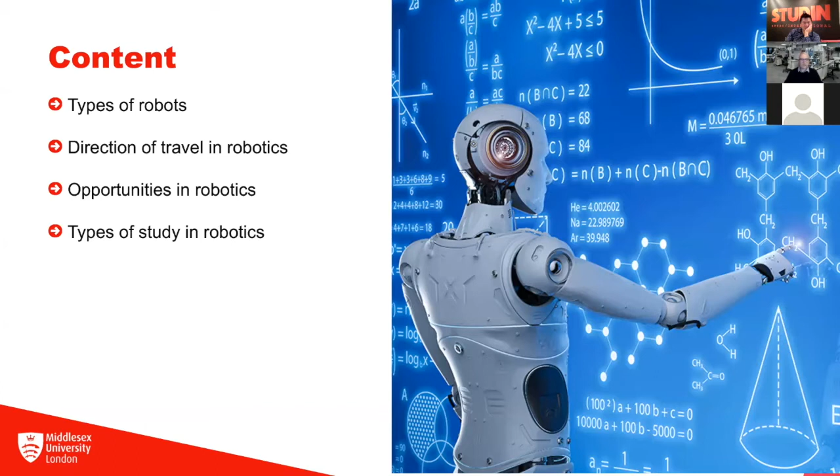I'll try and give you some examples. If we look at the types of robots that are currently around, initially we only had industrial robots, and we used to classify them based on their geometry - Cartesian robots, spherical robots, etc. But these days we have a lot more other robots around rather than just industrial.

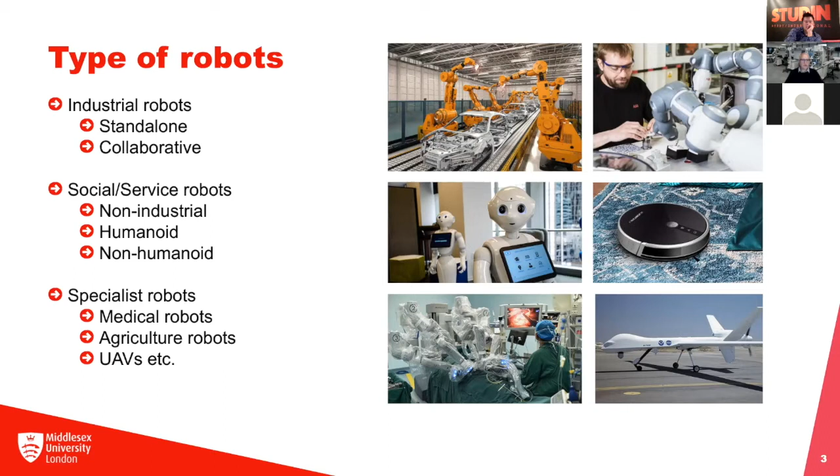So all of this gets under the title of robots, and I'll go through each one of those three sections and give you some examples of where the state of play is.

So industrial robots haven't quite grown as much as they should have in the past. But if you look at the more recent figures, there are currently about 2.7 million industrial robots operating in factories around the world.

But as I said, only recently has that actually increased - 85% increase we've only seen in the last 5 years. It's becoming quite a large sector in terms of revenue or value in installations, looking at close to $14 billion industry. And 73% of that investment is actually taking part in 5 countries like China, Japan, USA, Korea, and Germany - those are the countries that actually have the biggest number of robots.

And if you look at the density of robots around the world, and we look at the employees - if you divide the employees by groups of 10,000, for each 10,000 employees there are 113 robots worldwide. Obviously, these are concentrated more around different countries.

For example, if you take the same measure and look at the top 5 of dense industrial robots in the world, you'll see the five countries - Singapore, population-wise, tops the biggest density. They have 918 robots per 10,000 employees, where in Sweden that's down to 277. It's significantly more than the UK, you might say.

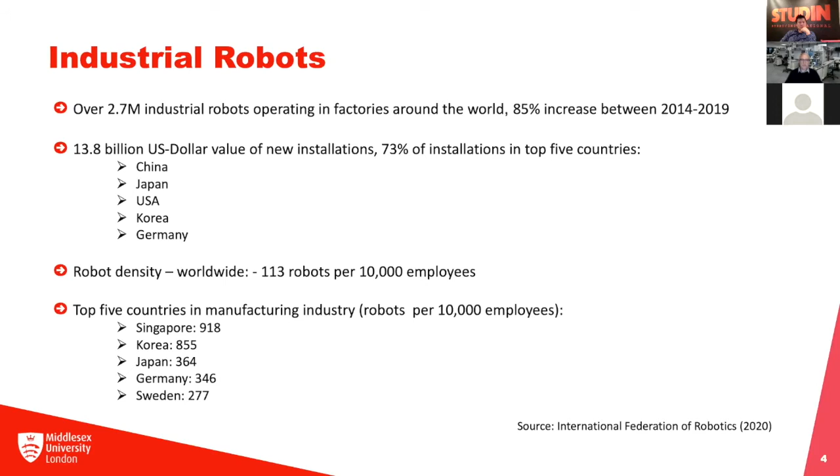They offer several advantages compared to industrial robots. They no longer need a protective environment, for example they don't have to be in a cell, they can just be in a workplace with other people around them. A lot of companies use these because they don't need specialist labor. Untrained people can still use these robots to program them because they're task-led. They can just remember what you show them they should do, and they often complement human-led operations.

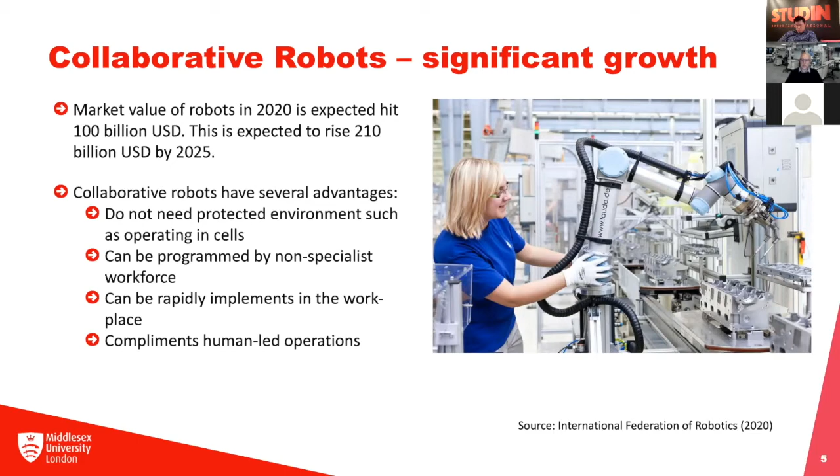Sweden is actually quite good at this, and I'll give you a quick video of how this is used in practice. This is a clip from ABB Robots.

Yeah, but we'll see. Let me just see.

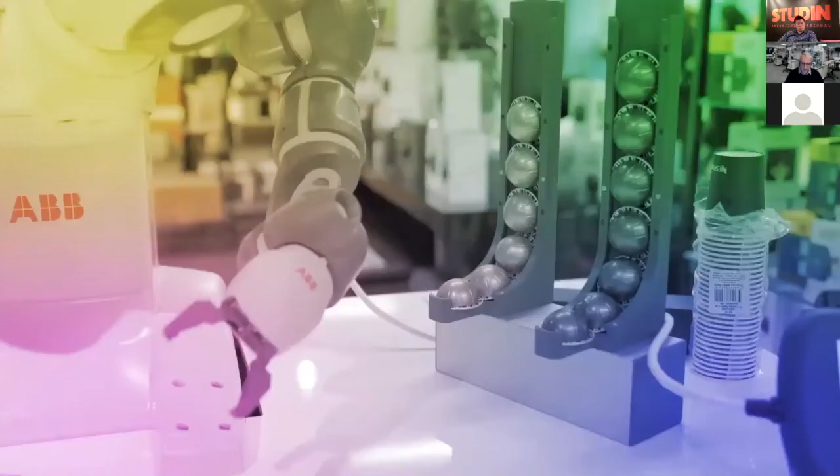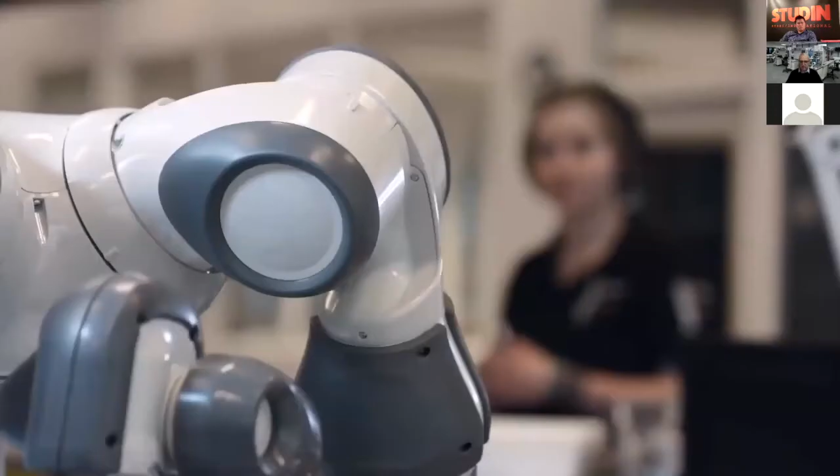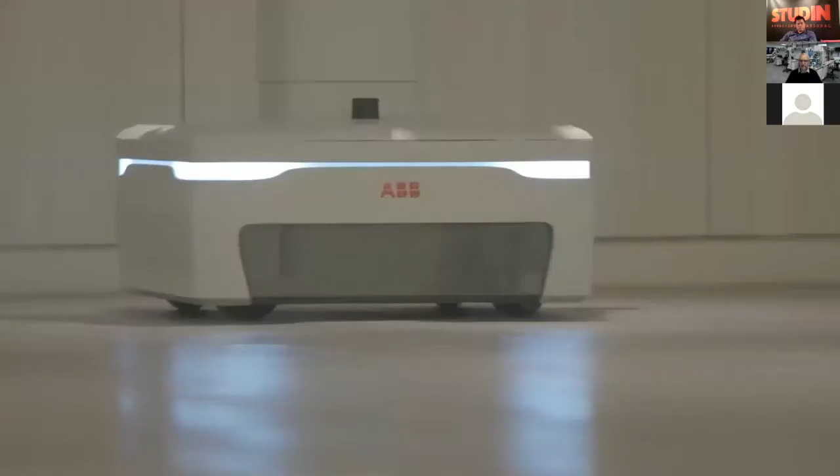Yumi is 5 years old this year, and in the 5 years since ABB's collaborative robot was introduced, it certainly proved a tasty treat for the public, conducting operas, starring in music videos, and meeting a host of world leaders. But Yumi is about so much more than just eye-catching photo ops. For industry, the advent of a truly collaborative robot working alongside human staff has been little short of a revolution. Before Yumi came along, robots were typically corralled inside protective cages or behind safety barriers. Yumi's different. With an ergonomic, human-centered design, padded arms and motion control software, it can be installed in workstations alongside people, working collaboratively on tasks with human colleagues. And lead-through programming means it can be programmed in minutes by someone with no specialized training. That all makes it ideal for material handling and assembly jobs, while its accuracy has meant Yumi has found a place in medical research too, increasing hygiene and efficiency. The Yumi family has continued to grow. The concept of a mobile Yumi has been tested, and there's also a single-armed model that can be mounted on tables, walls, or ceilings. Yumi led robots out from behind the barriers, and it's now looking forward to another 5 years of human-robot collaboration.

There we are, just celebrating with those successes from Sweden, but I think they're also manufactured around the world, particularly in Poland, but they're sold globally. We also have research centres within the UK using this, and at Middlesex where I work, we also have several of these robots as well.

Alongside the industrial robots, the new category of robots are called social robots. These tend to be seen in non-industrial applications such as personal assistance, customer services, and more in terms of healthcare. I'm not talking about entertainment robots, these are actually used for daily supportive activities. A lot of developed countries are now preparing to invest into social robotics, particularly for healthcare applications and caring for people.

I'll also show you some videos of work currently taking place at Middlesex with other collaborative partners around the world, including Sweden.

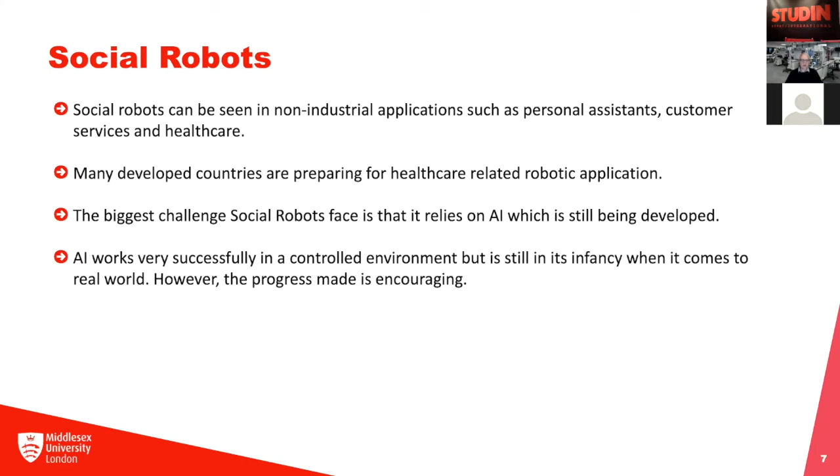So the next video I'm going to show you is a project called Caresses. This is a European funded project across 8 different institutions from Europe, spanning Sweden, Hungary, UK, and also Japan. The purpose is to look at culturally aware robots and how these will be developed in cases where we look at healthcare, and how this can help deal with people, particularly the elderly.

This is quite a longish video, so I'm going to play it a little bit at the beginning and then skip it and give you some examples at the end.

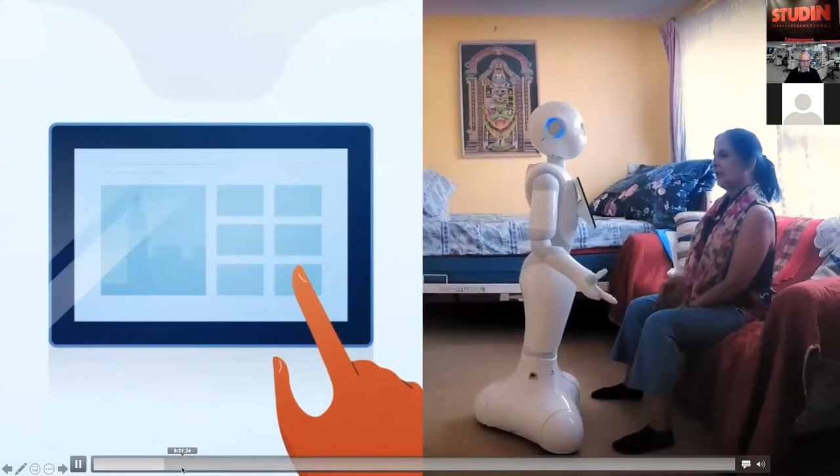Which monument is in this photo? It is the Westminster. Oh, wait a minute. Big Ben. That's correct. Well done. Thank you.

Do you want me to play for you one of the highlight scenes of the movie The Ladykillers? Yes, please. Great, let's do that.

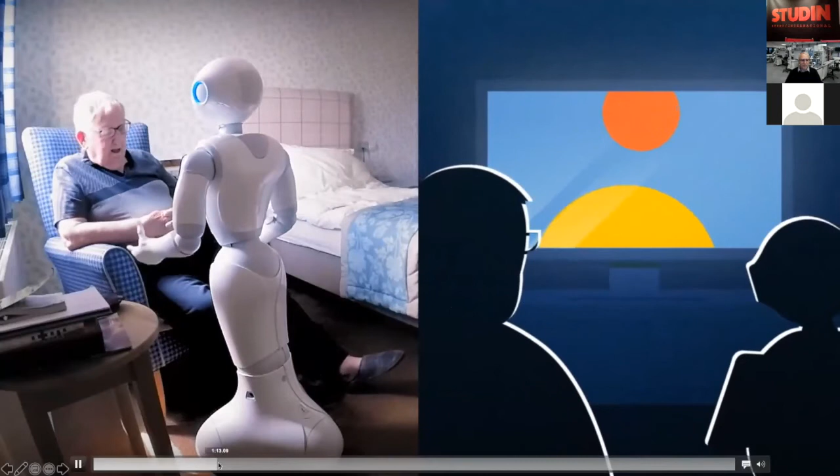Tell me what kind of situations make you feel happy. Lovely, lovely to be with Pepper. I'm a very cheerful lady, I love children. I'm happy to be surrounded by the children. I like lovely music. I don't like to be alone, because I was born in a very big family.

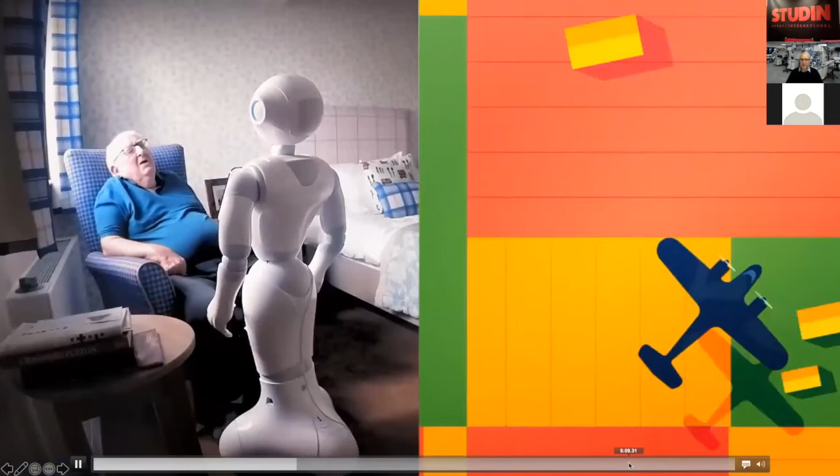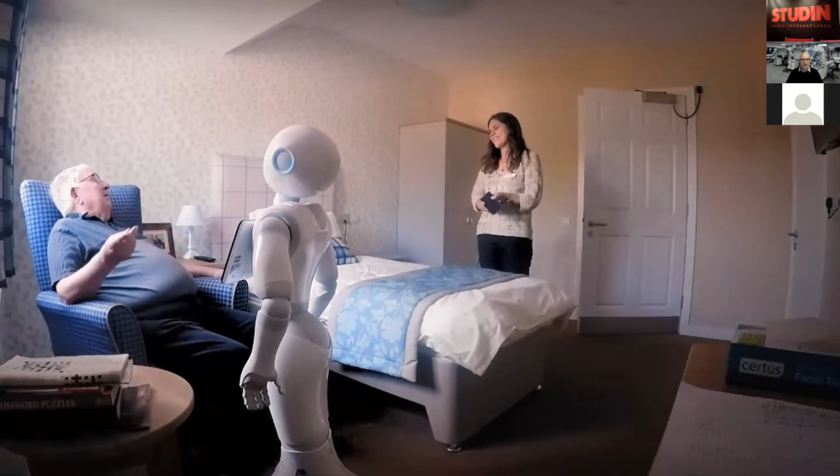I know that many children were evacuated from British cities to the countryside during... I finished, and it's been lovely. I had some music that you may have heard. I had Chuck Berry, and then I had the Pearl Fishers. Oh, that's classical, absolutely beautiful. I told my children that I have the company of Pepper. Pepper is so adorable, and he is a very good companion to me.

Yes, in the previous example you saw how Pepper the robot is actually interacting with the elderly in care homes. One of the issues is loneliness - you saw the lady talking to Pepper about how she doesn't like being left alone and growing old on their own. So these robots are becoming more and more used in homes and care homes with the elderly, whether it's having a conversation or keeping them busy, keeping the interactions going. It's being accepted because people in that situation didn't really grow up with technology, but what they do understand is human interaction, and these machines are serving in that sense.

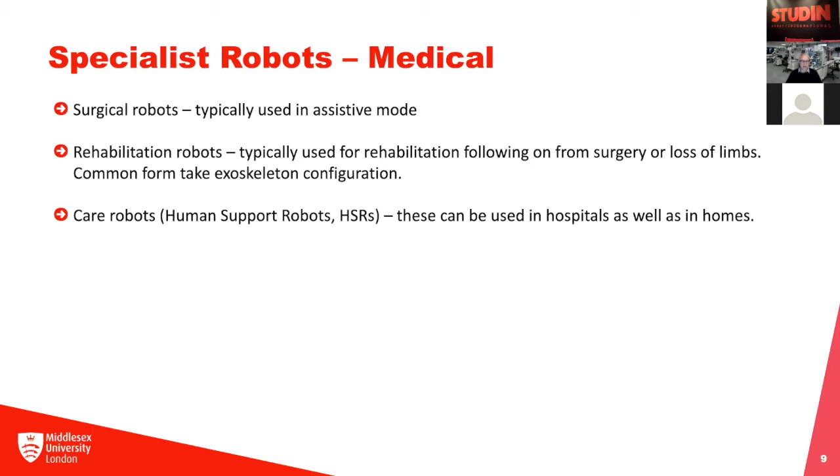The next clip shows you Guy's Hospital in London and how they use their medical robots, featuring one of the surgeons that operates this machine.

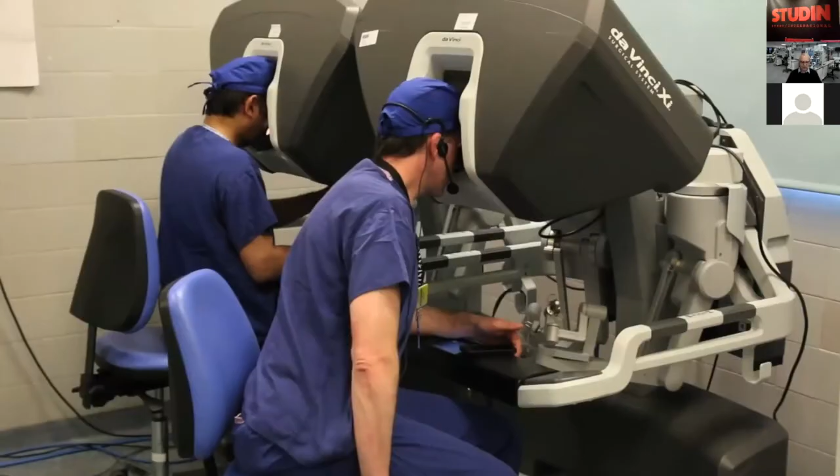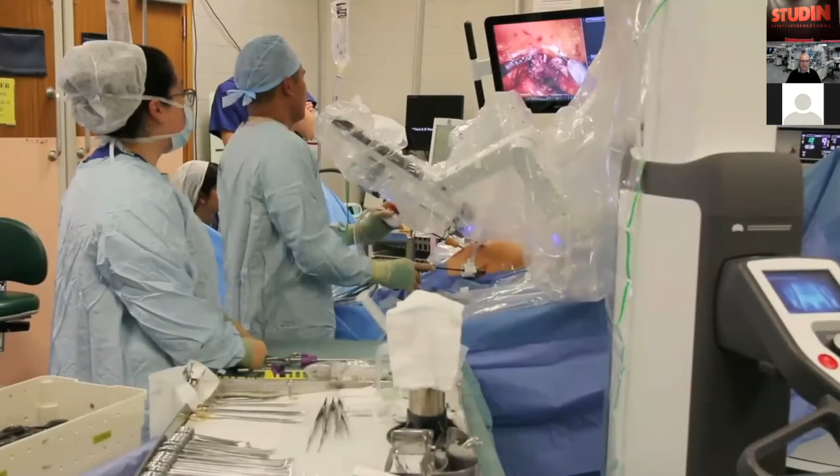I'm Ben Challacombe, one of the consultant urologists at Guy's, and also one of the robotic surgeons. The robotic surgery program at Guy's and St Thomas's has been going now for 13 years - it's the longest program in the UK. Almost 3,000 patients have been treated with robotic surgery here. We mainly treat prostate cancer in terms of the highest percentage, but also have a very strong program for both bladder and kidney cancer, and some other rarer cancers within the urological group.

Robotic surgery is really just a variation on standard laparoscopic, i.e. keyhole surgery. It uses the same small holes in the patient's skin, the same small scars, but instead of long straight instruments controlled by the individual surgeon that just go left and right and up and down, little tiny arms go in that are controlled by the surgeon but away from the patient. These arms have a higher range of motion, and they're connected to a machine called the robot, and the surgeon operates from a console that can be several meters away from the patient.

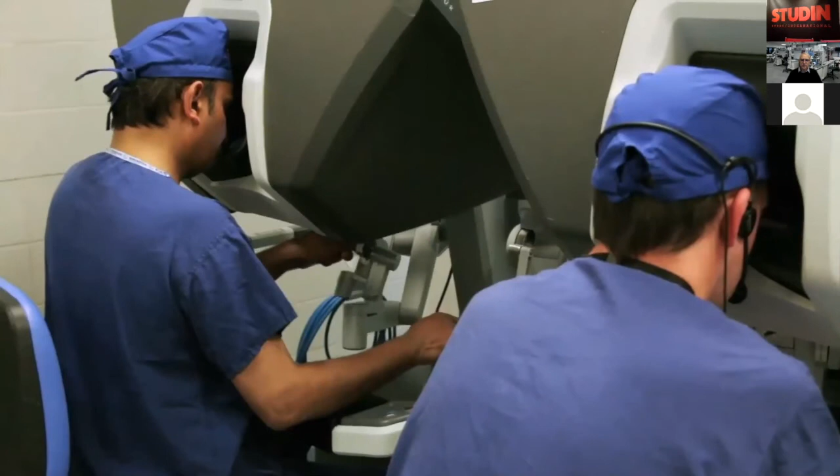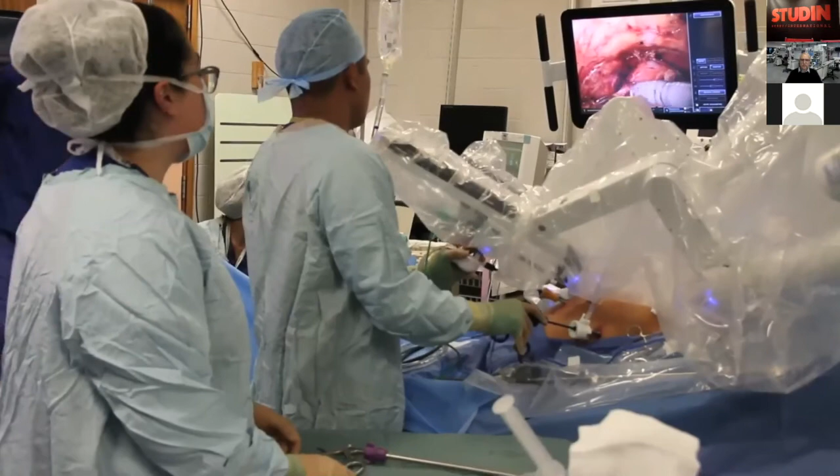Robotic surgery has many patient benefits, from the minimally invasive aspects of the surgery - quicker recovery, smaller scars, less blood loss, less pain, earlier return to work and less stay in hospital. But we also think there are aspects of the operations we can do much better with a robotic approach than either laparoscopic or occasionally a traditional open approach, because of the dexterity of the robot, the precision, and the three-dimensional vision it gives you. So we really have all of the technology at our fingertips to provide the best treatment for our patients.

So that's the case in terms of robots in medical fields and how this is used to assist surgeons, and also for the benefit of the patients, so it's quicker recovery.

The other area of growth in specialist robots is UAVs, unmanned air vehicles. They're not always called drones - UAV is probably a more generic term. We're expecting this type of robot to increase.

Currently there are not many around in use. They're in labs, but they're also being tested in the field. We're expecting to see around 2.5 to 2.6 million units by 2022.

Many logistics companies are now looking at this as another way of distributing goods around the world and around particular countries, particularly congested areas. You may have known the company called Amazon, which is quite prominent in the way it is now shipping around the world and countries, particularly in this current pandemic period.

They've teamed up with an American company called AgEagle Aerial Systems. AgEagle actually makes agricultural robots, but they have quite prolonged know-how in drone logistics. What we'll be seeing shortly, in a year or two, is deliveries coming by using drones.

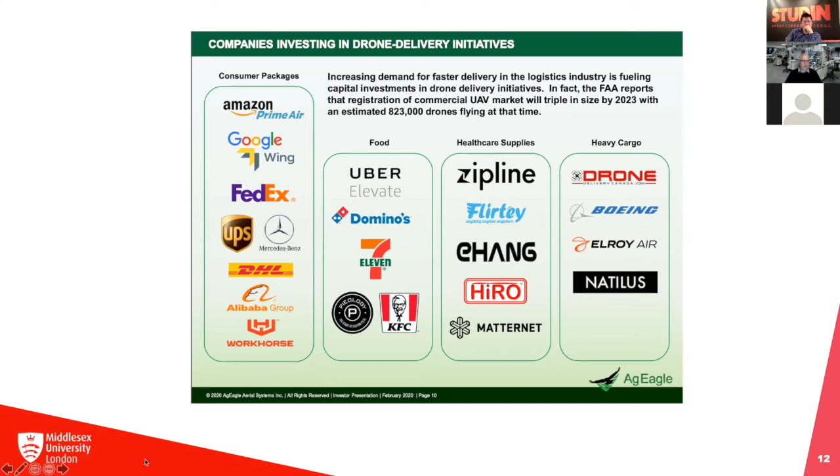The other area of specialist robots - we talked about surgical robots and UAVs, but there's also a lot of work going on into agriculture. The next video shows how that is put into effect. For example, crop protection is one of the key areas where we are using robots to help.

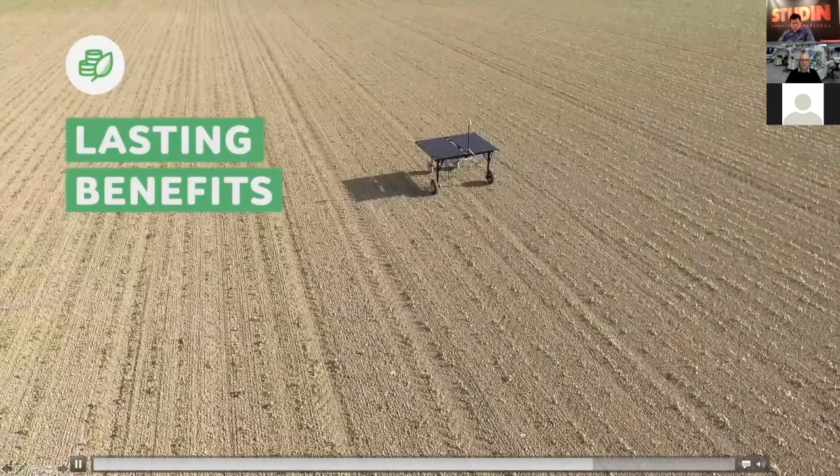As you can see, this is an area where there were big savings, particularly protecting the environment. The amount of pesticide they spray is now down to individual weeds rather than a blanket approach.

So where are we heading with all this? I'm also conscious about the time, so I'll try to speed up a little. In terms of direction of travel, many companies are looking into predicting what will happen in the future, how the workplace will be affected.

A technology organization called PricewaterhouseCoopers did a survey recently, and they looked at 29 countries and considered 200,000 jobs and how this is going to change. In terms of the increase, we're looking at a $15 trillion business.

So in 10 years' time, AI - artificial intelligence - will have an impact that will generate something like a $15 trillion business for developed countries. At the moment, 3% of jobs are under threat by automation.

But in 10 years' time or so, by the mid-2030s, that threat is going to affect about 30% of current jobs. But there are also going to be opportunities.

But where the threat is actually, it's on the low education, high risk automation areas. So you'll see some of these areas being impacted, but there are also opportunities in growth areas in terms of how we will interact with the incoming technology and the benefits that it will bring to us.

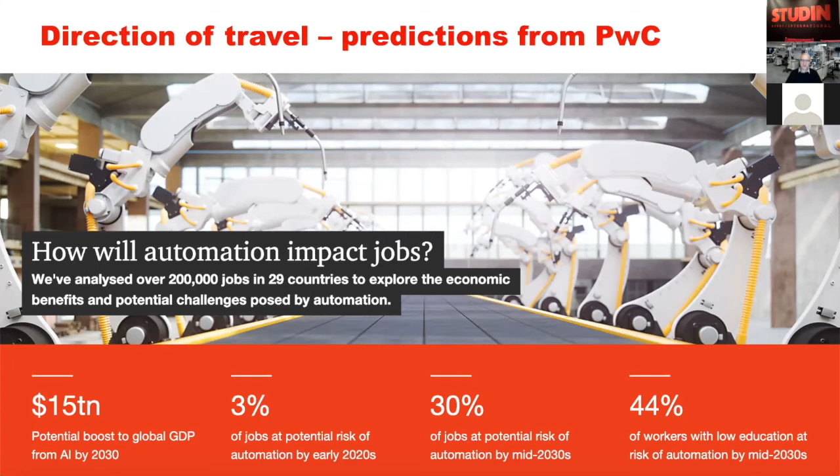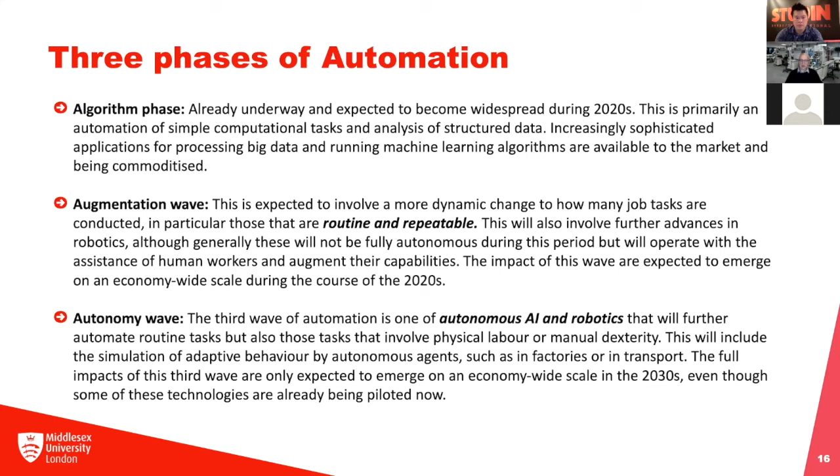We will need to change ourselves a little, and there's 3 phases of this. What's happening now is an algorithm phase, looking primarily at automation of simple computational tasks. That's going to increase by the late 20s, next 6-7 years. We're going to see work that is routine and repeatable being replaced by automation. But it won't be until the early 2030s that we're looking at autonomous AI and robotics. At the moment, we don't see much work going on with autonomous systems - the AI isn't developed sufficiently robustly yet.

So what should you study if you want to go into education or higher education? What area would you go into? Well, intelligent automation is probably the area you should be considering if you're interested in technology-led areas and want to be part of that. The key thing is on intelligent rather than just automation. To do the intelligent bit, you need artificial intelligence to develop sufficiently to enable you to do that. And if you're going to work in that area, you need to study those areas.

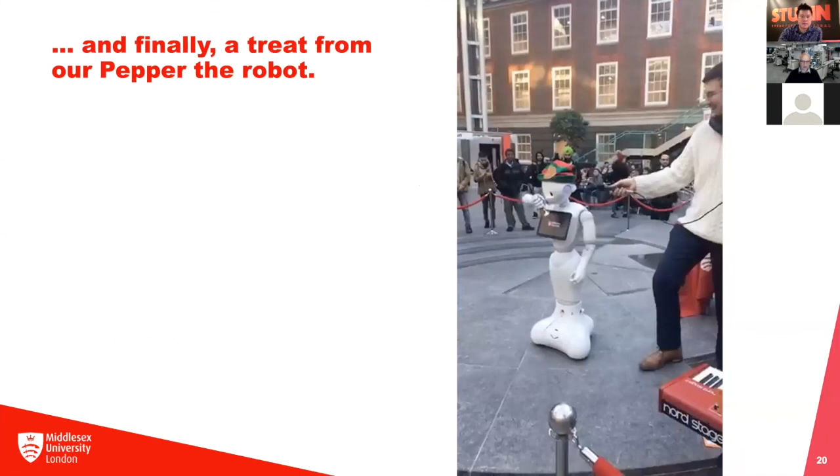So from us at Middlesex, I think I've eaten up all my time available, and I'm just going to leave you a short treat from our resident robot at our campus.

And this is our Pepper. Pepper would like to sing to you just to celebrate the time of year, and then see what you think.

The next song is the well-known Jingle Bells.